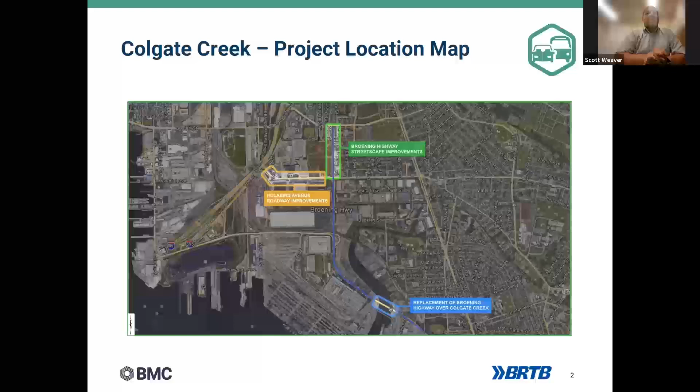We've done some other streetscape and roadway improvements up at Holabird and a little further up Broening Highway to beautify the community. This project was kind of fast-tracked. The bridge itself is 50 years old and in poor condition. It has carried several very large loads over it because the bridge was never designed for excessive loads, and it didn't hold up very well. We therefore had to complete emergency repairs in 2014. When we had to replace the bridge, we worked with the port on the new loads for the new bridge so that this wouldn't happen again.

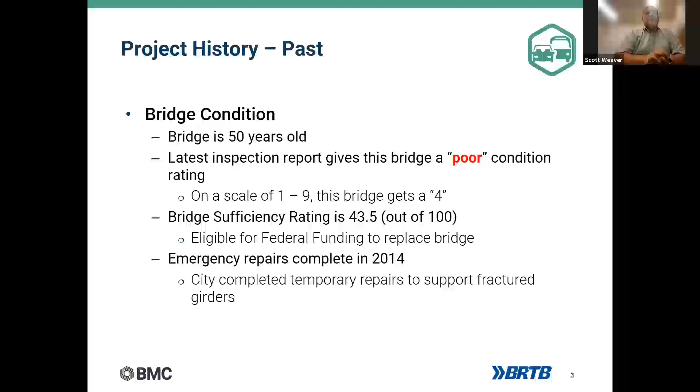When the project originally came out, Baltimore City Hall had applied for a federal aid Tiger grant that would supply $10 million, and the city would match it with another $10 million.

As construction started and continued, we had several construction issues, and the project was unavoidably delayed. Because of the delays encountered due to difficulty in construction, the Tiger grant ran out. So we've only been able to expend $8 of the $10 million, leaving a $2+ million gap that we're going to need to fill.

In order to fill that gap, we would like to use our federal aid allocation that we receive from the federal government through SHA. To do that, we have to add the project to the TIP, which is the purpose of this.

As you can see, at NTP for construction there were issues with contractors means and methods. We found a solution. There were also some pile driving issues — several of the pipe piles experienced issues going down to the mud, and we had to do some retrofit design of the piers to accommodate.

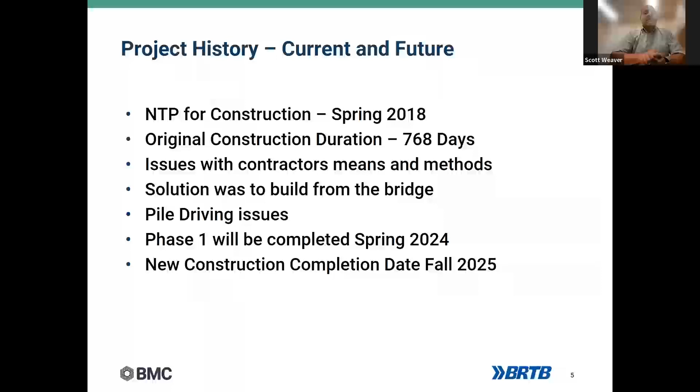Thank you, Scott. Okay, we're going to ask for the approval of the resolution after the three amendments. If you have any questions on the Colgate Bridge, you can ask them now, but we'll do the resolution at the end.

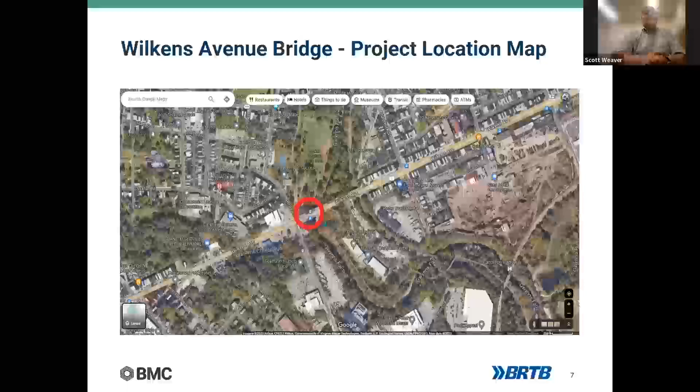It's a single span arch bridge. It's quite old — next slide, please. I'm sorry, I don't have it, thank you. The bridge, like I said, is 87 years old.

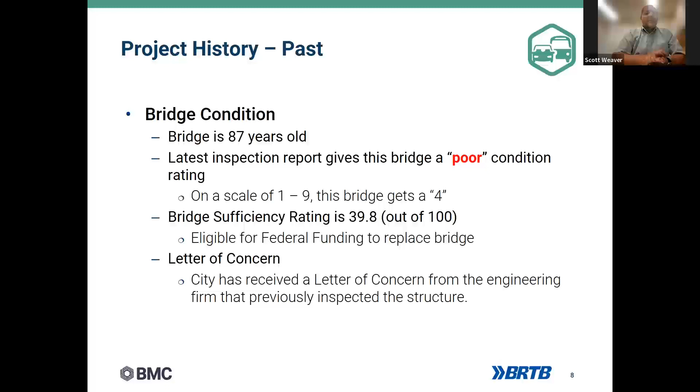It's in poor shape. We're required to inspect every bridge, as you all know, longer than 20 feet in length carrying vehicles, at least once every 2 years. This bridge, we received multiple letters of concern. As a result, we designed the bridge for replacement, and it's been in our CIP for several years.

So clearly something was missed. We need to go back with our engineer and figure out what was wrong with the project, so that we didn't end up with multiple change orders. So we need to re-advertise the project.

In order to re-advertise the project, we have to add it back into the TIP, because it was taken out of the TIP since it was expected to be under construction now. The project, as it was advertised last year, the FY24 TIP took over July 1st, and we expected to be under construction at that time. Unfortunately, we're not. We have to re-advertise the project, and to do that we have to add it back into the TIP, which is the purpose of this.

Any questions on Wilkens Avenue Bridge? Thank you.

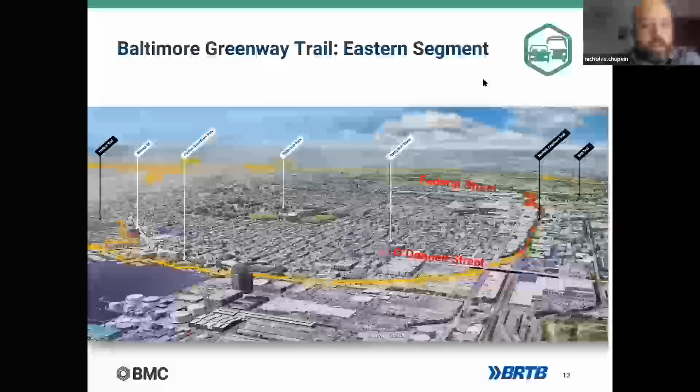So on the right side of that map is what we're calling the Eastern segment. It's the 1.8 mile continuous right-of-way, formerly used by the Pennsylvania Railroad, currently owned by Norfolk Southern, from approximately O'Donnell Street in the south up to Federal Street in the north.

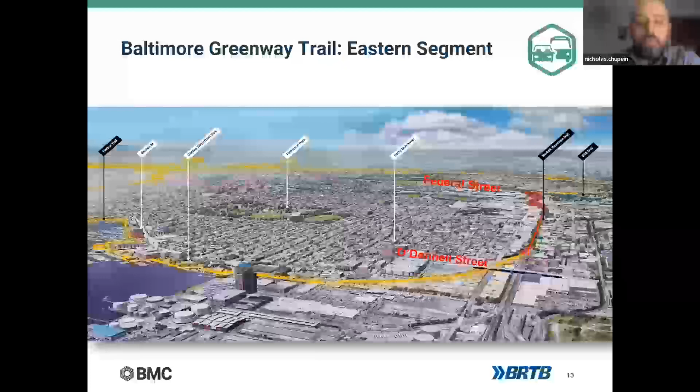In 2020, Ernst & Young completed an economic benefits study on the Greenway Trail as a whole and determined that a $28 million investment would return over $113 million in associated local business activity, reduce vehicle miles traveled up to 8.6 million per year, and avoid $2.5 million in health costs, specifically due to accidents, among other benefits.

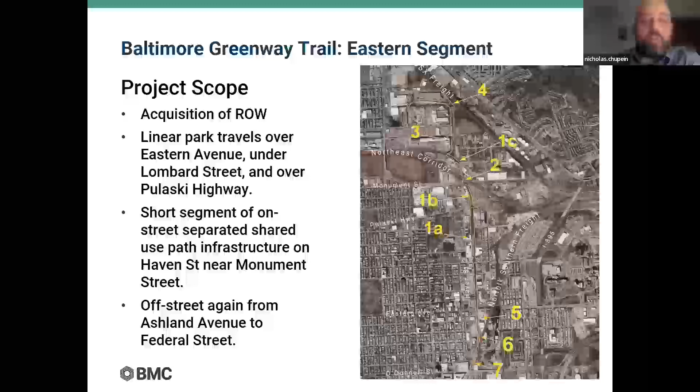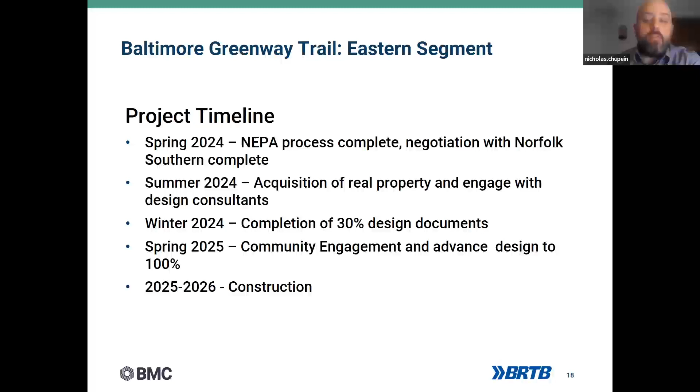This shows our rough timeline. It's a complex project with a lot of stakeholders and facets - potential intersection with the Red Line is not the least of them. We're thinking optimistically here, but we want to complete the NEPA process and negotiations with Norfolk Southern by spring, start the engineering and design process thereafter to be completed in early 2025, and we're aiming for construction of the major elements by the end of 2026. That's what I have on the Greenway Trails. Thanks for your time, happy to take any questions.

Thank you, Nick. So as Regina indicated, all three of these are in the same resolution. So any questions on any of the projects?

Sam: Thanks, Dan. A question on the Colgate Creek bridge replacement from Broening Highway. I think this is more out of curiosity, but the port now has a heavyweight port corridor that uses Broening Highway for permitted loads up to 100,000 pounds gross vehicle weight. I'm assuming the port and the city coordinate on that, and whatever the new bridge is being designed to carry those weights that are now permitted. More of a curiosity than anything else on my part.

No, you're absolutely right. When we decided to replace the bridge, we went to the port and said, look, what's the heaviest load you got that comes out of here? We need the axle spacing, we need the axle loads. That way if something happens and a heavy move has to go out there, the vehicle doesn't have to make a right and go all the way down to 695 - they can make a left and go straight up to 95 and be gone.

Excellent, no, I was just curious, that's all. I remember that port corridor heavyweight permit from several years back, and I remember that being a pinch point. Sounds good, I'm sure that'll be great to get that done. The port is very excited about that. I'll bet they are.

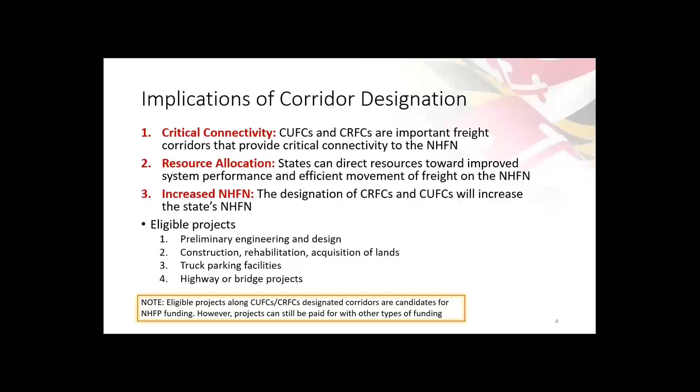Projects located within the corridor are eligible to apply for funding through the National Highway Freight Program, and these projects include a range of potential initiatives such as PE, design, road widening, truck parking expansion, and bridge projects. Please note, while projects within those critical corridors can access funding through the National Highway Freight Program, alternative funding sources such as state or local funds can also be utilized to support these projects.

SHA and BRTB already completed this process in 2017 under the FAST Act. During that time, Maryland's CUFCs had a maximum mileage of 75 miles, distributed amongst the MPOs. Considering the BRTB's status as a large MPO, a 25-mile CUFC was assigned.

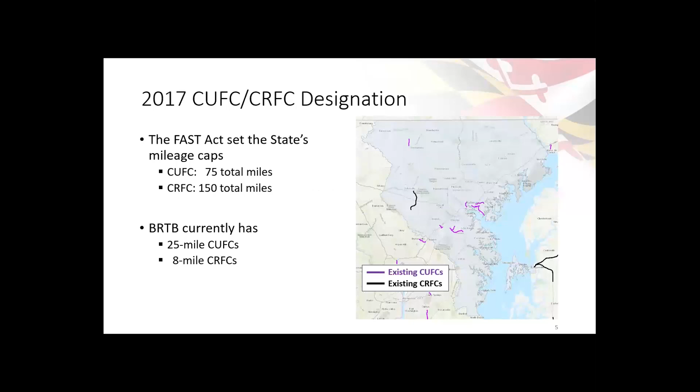Under the new IIJA, the mileage cap for both the CUFC and CRFCs in Maryland has been doubled. The eligibility requirements remain the same as those outlined in the FAST Act. As a result, the BRTB will now have a total of 50 CUFC miles.

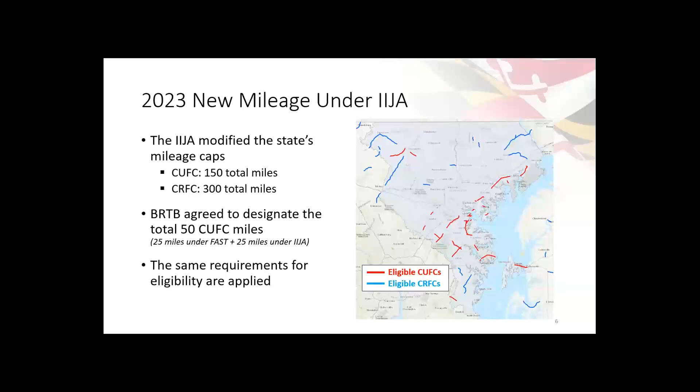The eligibility requirements for CUFC are as follows: the road must be located within the urbanized area in the state, and it should serve as the last mile segment for freight transportation. For CRFC, the requirements include a rural principal arterial roadway with a minimum level of truck traffic. They should provide access to freight generators, and they should also connect to the interstate system.

I would like to explain our coordination plan with BRTB regarding CUFCs. SHA and BRTB will lead the designation process, and to help facilitate this, SHA has developed a methodology to identify eligible segments utilizing the new urban area boundary published by the US Census. These eligible segments can be accessed through an online dashboard.

We have conducted a meeting with the technical staff at BRTB to review and select the segments. At the end of this process, the final designation letter to FHWA will be drafted by BRTB. For CRFCs, MDOT will lead the designation, and we will work with our regional planners and district staff to identify and review the segments. But still, for those segments on the MPO's boundary, we will ask your staff for concurrence.

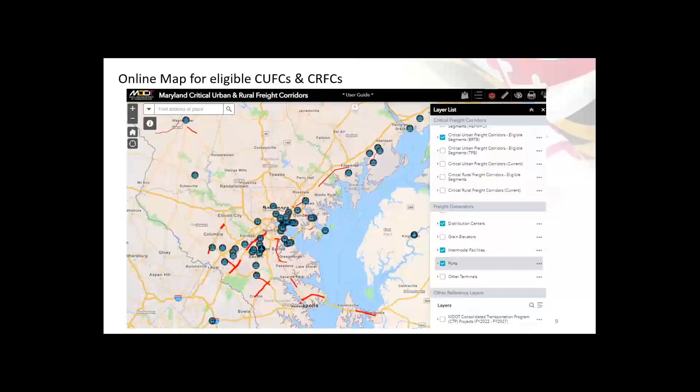The BRTB staff and I will evaluate the individual eligible segments based on their significance in freight movement. Our consideration will include factors including truck traffic, the proportion of trucks on the road, truck volume growth, and presence of any project in the vicinity.

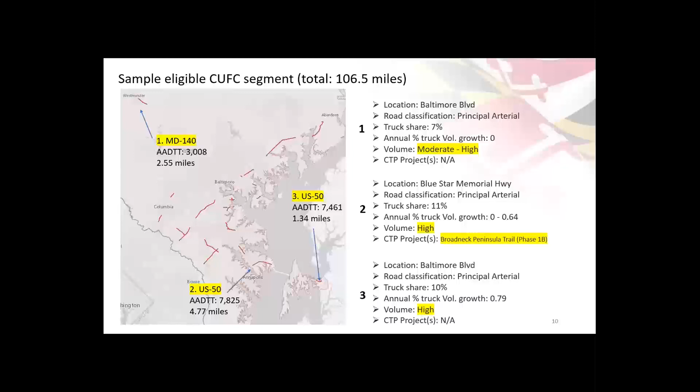That brings us to the end of presentations. I appreciate your attention. If you have any question or further clarification on any point, please feel free to ask. Thank you.

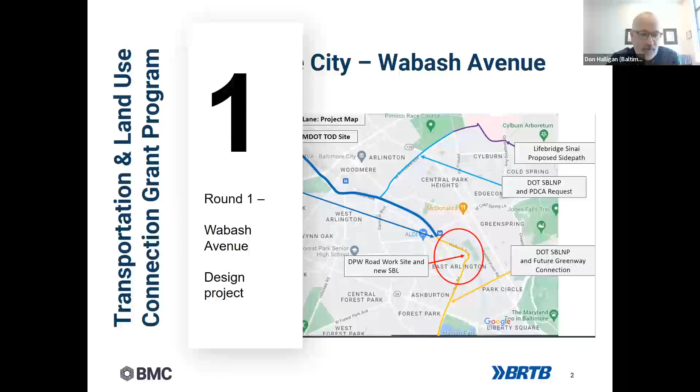We have two projects in the queue for that. The first one was in Baltimore City. Just as a refresher reminder, we did get three projects, and the two that we selected were the two standout of the three. So this is the first one in Baltimore City. It was on Wabash Avenue.

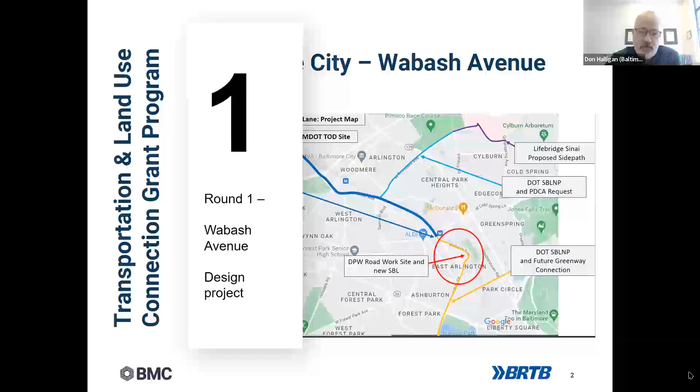You hit the clicker there. You can see the corridor in blue. It goes from basically Reisterstown Metro Station down to the West Coldspring Metro Station along Wabash Avenue in Baltimore City and northwest part of Baltimore City, and connects some existing trails that they have.

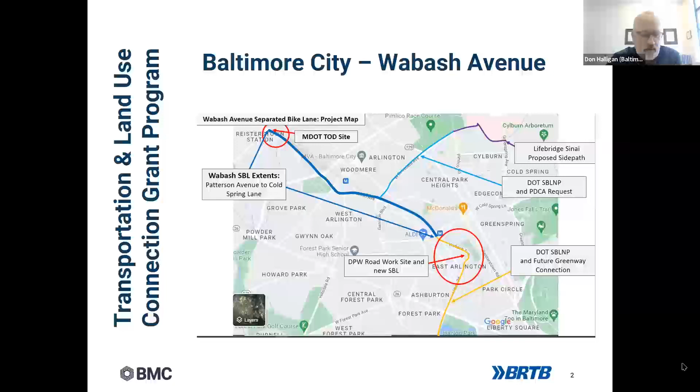This would be a separated bike path. You can click that slide. That gives you a little sense of what we're talking about. You see the rail line there. The Wabash Avenue is actually on the other side of that, of the railroad track. So that is the metro line.

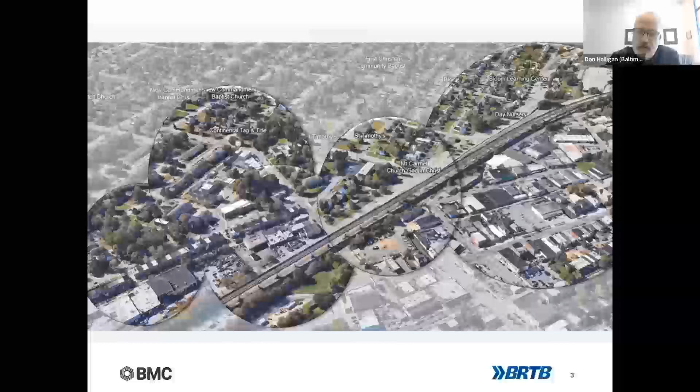Next slide. So this was going to be a preliminary design for a 2-mile separated bike facility along Wabash Avenue. It was adopted in the city's separated bike lane network plan in 2017. Again, it connects metro stations, and what took an extended amount of time was the city hadn't been out there really talking to the community about it, so many of the community members were surprised. They had to hold several

public hearings to discuss the project. But I think they're finally bringing the city, the community out there along. It was completed in the fall. We developed several typicals for the Wabash Avenue facility. We are still awaiting a final report. That's an example of some of the work that was done by RJM, the engineering company.

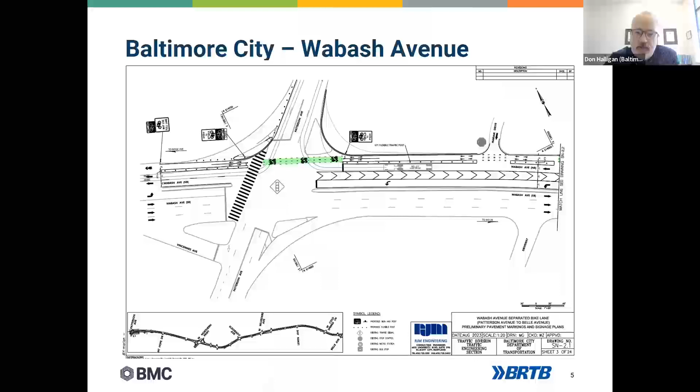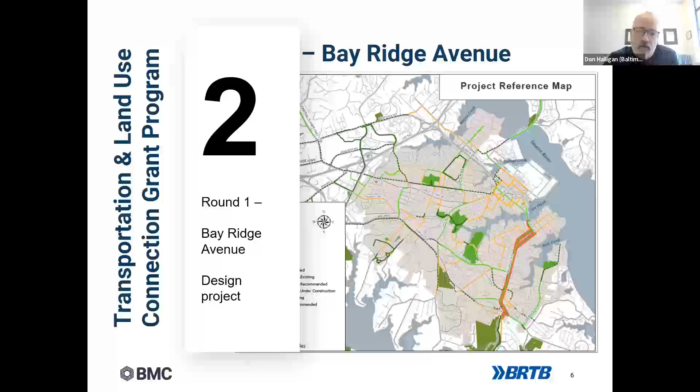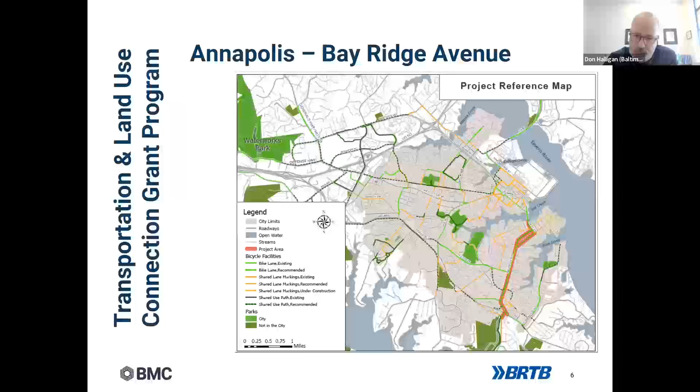The second project was in Annapolis along Bay Ridge Avenue. If you want to click the slide, you can see down on the left side where Bay Ridge Avenue is. It's that reddish orange color there, south of Spa Creek. You want to click the next slide.

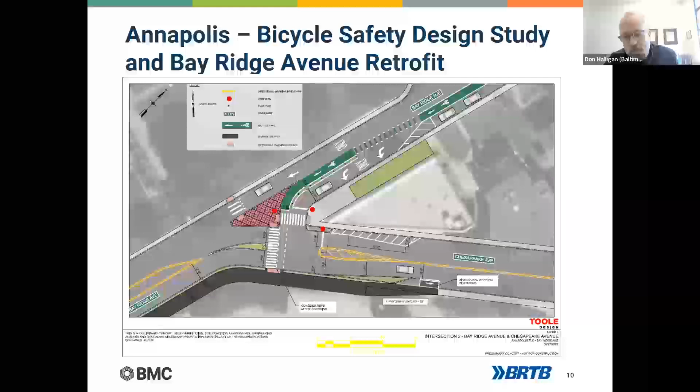Here's an example of some of the diagrams that were done by Toole. So we have two contractors, one RK&K and the other is Toole Design. RK&K has RJM as engineering.

We want to talk today about round 2, and Keith's going to take the reins over from here. Thank you.

Okay, thanks, Don. So as Don said, we are getting ready to kick off the second round of TLC projects. Most of you are probably familiar with the program from the last round, but just as a refresher for those not familiar, I'm going to briefly go over the program. I'll give you a little bit of the background, eligibility requirements, types of projects that are eligible, the application process, and how we score the applications.

The TLC program is intended to support local governments with planning and preliminary design of projects that will provide enhanced transportation access and mobility. So the goals of the program are to help revitalize communities and create activity centers, and help with the movement of goods and services. Projects in this program will provide additional travel choices and better accessibility for everybody. Projects will provide increased opportunities for communities to live, work, and play.